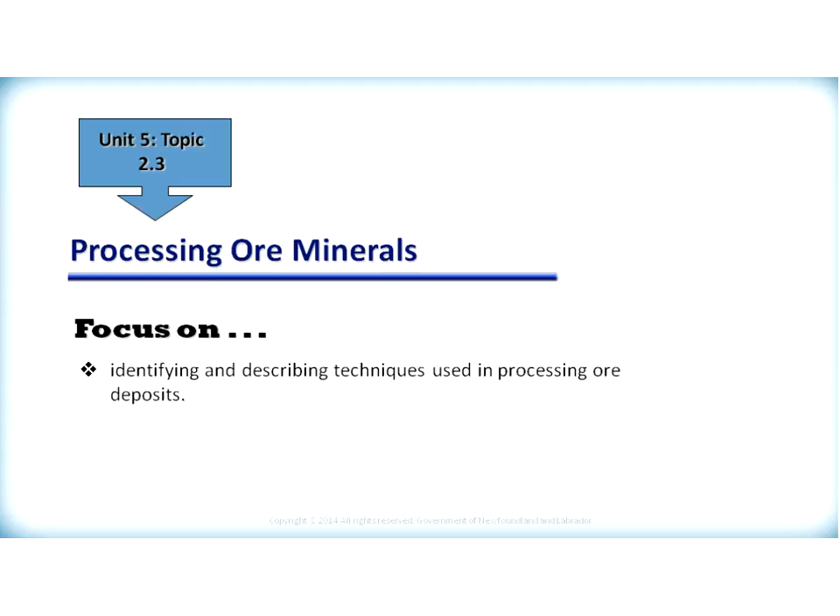Unit 5, Topic 2.3. This topic will look at processing ore minerals. This topic will focus on identifying and describing techniques used in processing of ore deposits. The ore processing techniques involve flotation, gravity separation, heap leaching, pyromet, and hydromet. These 5 ore processing techniques will separate the given elements or minerals from the ore so it can be further processed.

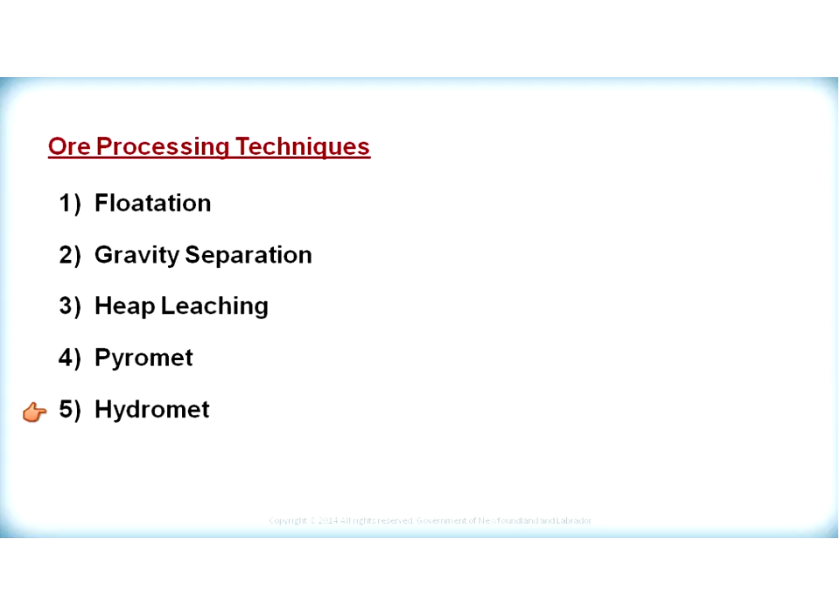Let's look at the first ore processing technique. This technique is called flotation. Flotation involves the mixing of ground ore with water, oil, and chemicals. The ground ore becomes suspended in the water and is subjected to air bubbles that are put into the water from compressed air. This causes the minerals and or elements of value to float to the top, where they can be skimmed off and further processed.

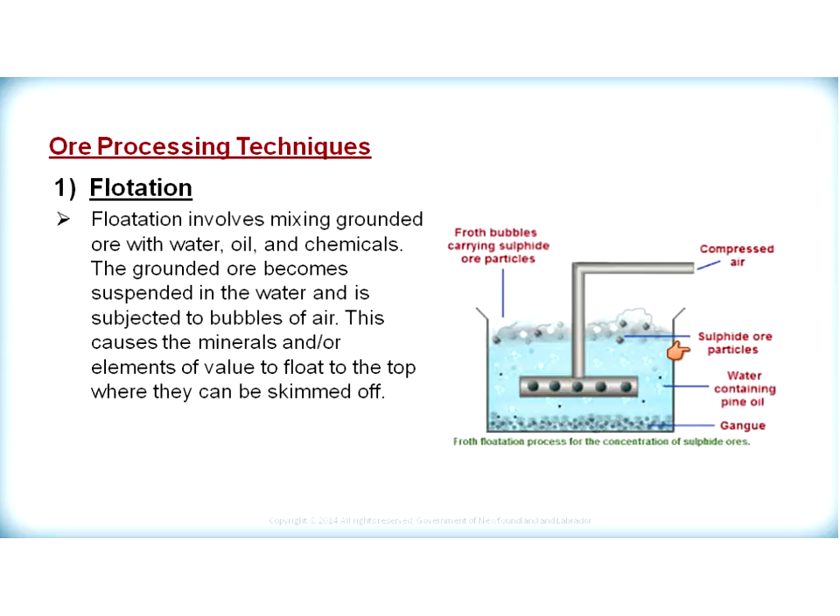The second process where we can separate the minerals from the ore is called gravity separation. Gravity separation involves feeding ground ore into a pulsating body of water, which serves to settle out the heavy materials while floating away the light materials. If the heavy material is what you wish to keep, then it is taken from the bottom. If the light material is what you wish to keep, then it is taken from the top.

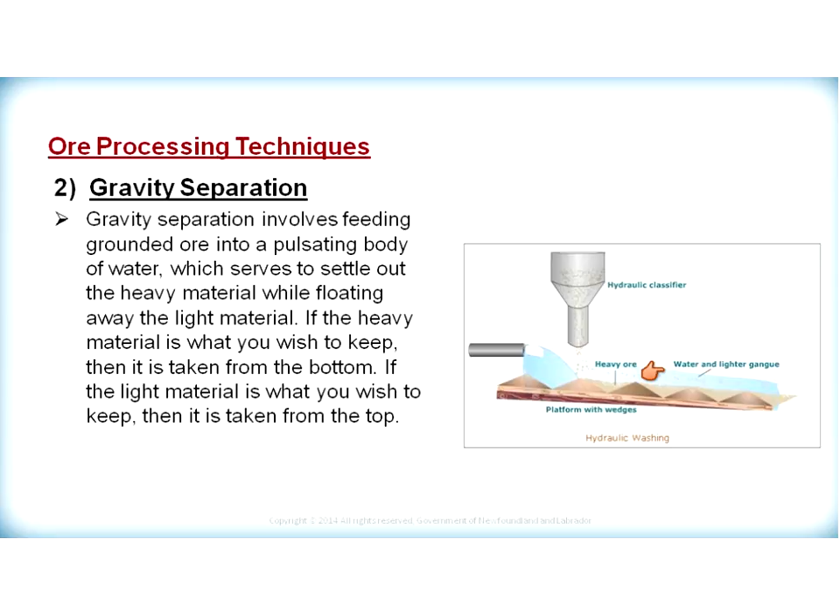A third ore processing technique involves heap leaching. Heap leaching commences by placing the ground ore as a layer onto impermeable material. The heap of material is sprayed with a liquid, usually an acid, which percolates down through to dissolve away the valuable minerals and elements. This liquid, or leachate, is then collected in a reservoir. The leachate is processed to extract the desired minerals.

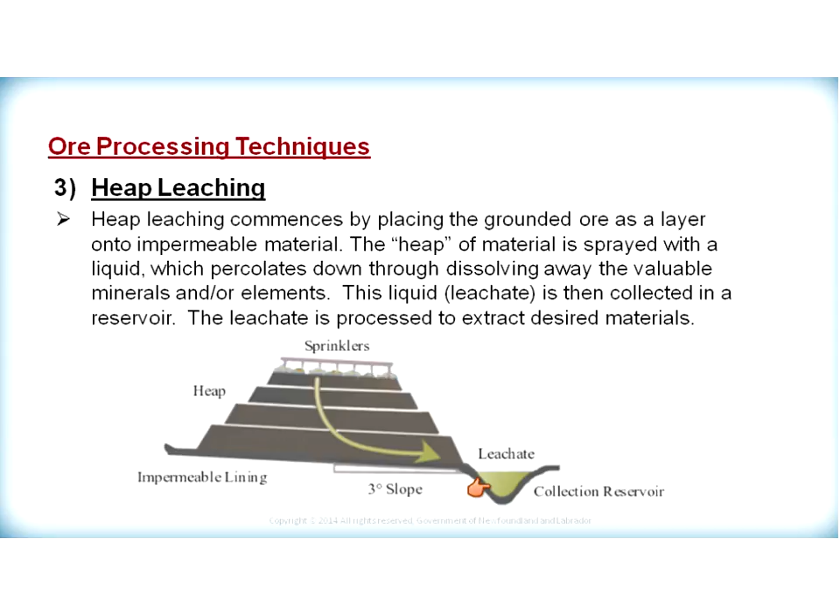The fourth method of ore processing is called pyromet. Pyromet involves using heat to separate minerals and or elements of value from the ore. Heating separates materials by density, and the desired minerals and or elements can then be removed. So the material is cooked at various temperatures, and at different temperatures, different elements will actually come out of the ore.

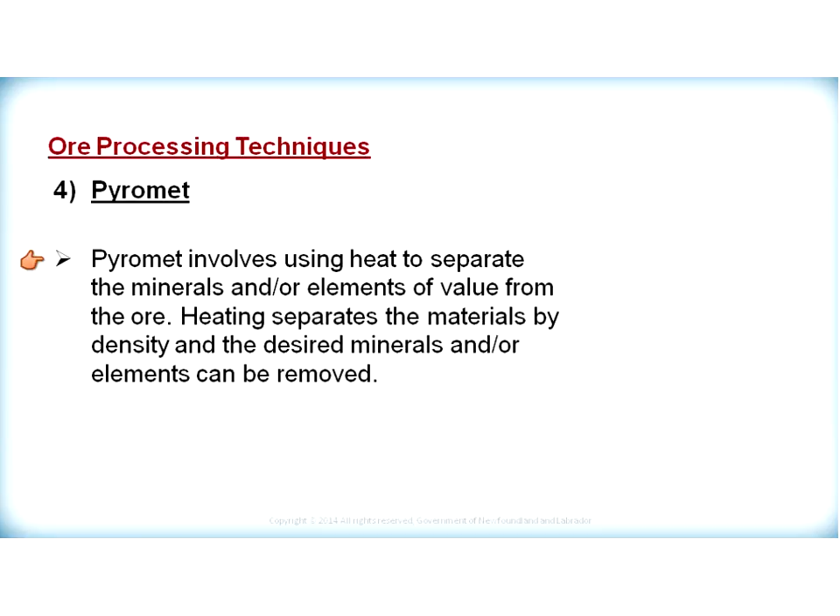A fifth ore processing technique is called hydromet. Hydromet is a chemical method that involves oxidation and acid leaching to separate out the desired minerals and or elements.

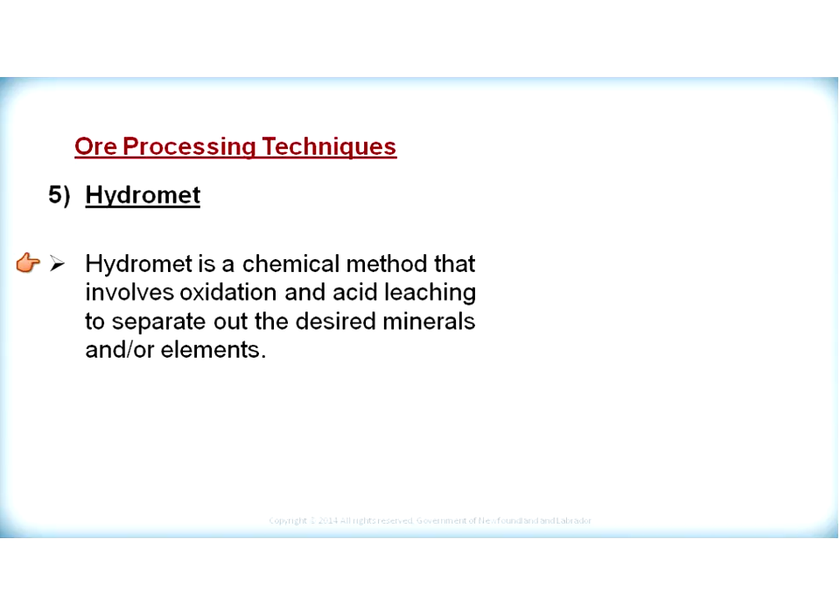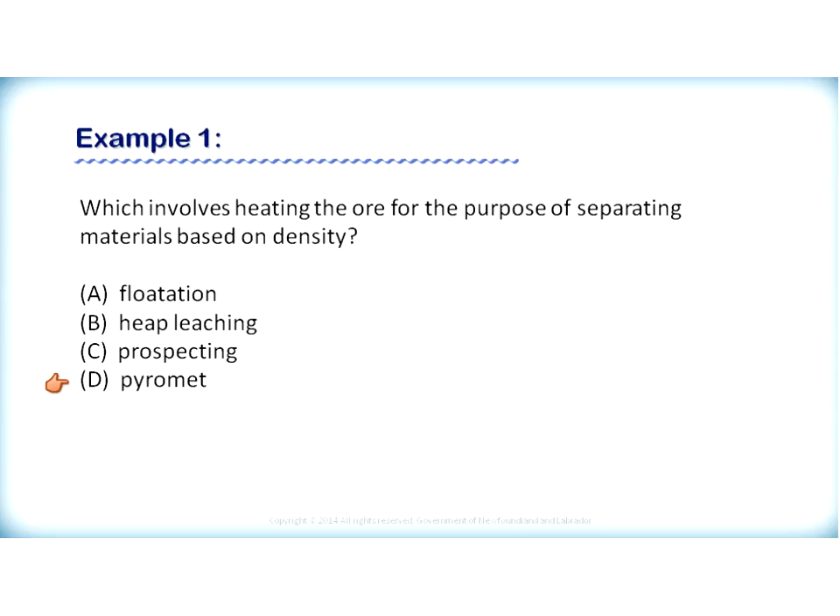Therefore, the answer to example number 1 is pyromet. Pyromet is used to separate materials based on density by heating the material up. So the answer to example number 1 is D.

Example number 2 reads, which technique involves percolation and dissolving away of valuable minerals from ore? If we look at the choices, we have A, distillation, B, gravity separation, C, heap leaching, and D, remote sensing. The answer to example number 2, heap leaching, involves percolation of liquids, namely acids, down through the ground ore, which dissolves away the valuable minerals or elements from the ore, which are later collected in a collection reservoir. So the answer to example number 2 would be heap leaching.

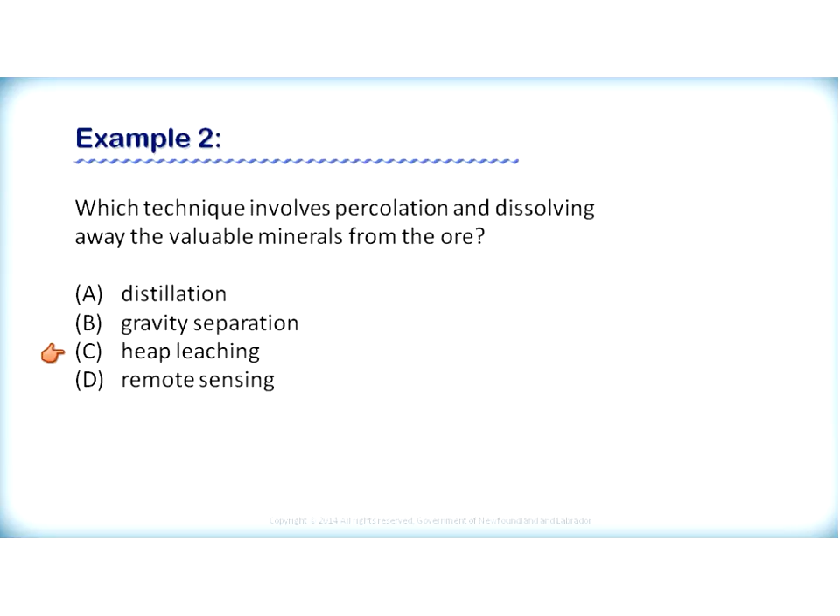Your turn. Take the time and complete the following question. The answer to this question will be on the following slide. You can pause your recording now to prepare your answer. The question reads, which mineral processing technique involves oxidation and acid leaching? The process that involves oxidation and acid leaching would be hydromet. So your answer to this question would be D.

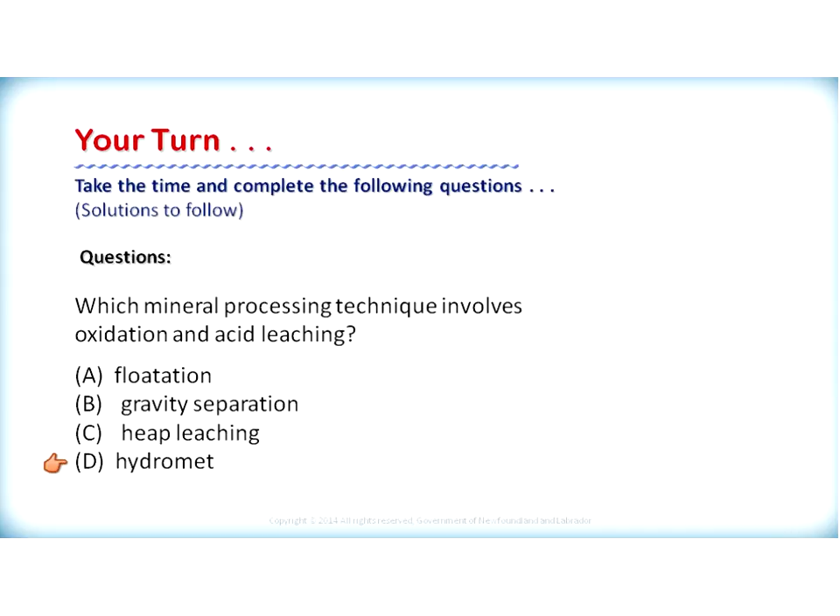Let's look at a review of the techniques used to process ore deposits. The 5 techniques used to process ore deposits include flotation, where air is bubbled through a mixture of water, oil, and ground ore, and the air bubbles float to the top, taking the desired materials with them, which can eventually be skimmed off and later processed. Gravity separation is a process where gravity settles the higher density materials to the bottom, and the lighter materials move away in the liquid at the top.

Heap leaching is a process by which a layer of ground ore is laid on top of an impermeable lining and later sprinkled with acids or some liquid that dissolves away the desired materials, namely minerals or elements, which are later collected in a leachate reservoir. Fourth, pyromet is the use of heat to separate minerals according to density. And the last would be hydromet, which is the oxidation of certain elements by leaching and collecting the elements for further processing. So these are your 5 techniques used to process ore deposits: flotation, gravity separation, heap leaching, pyromet, and hydromet.